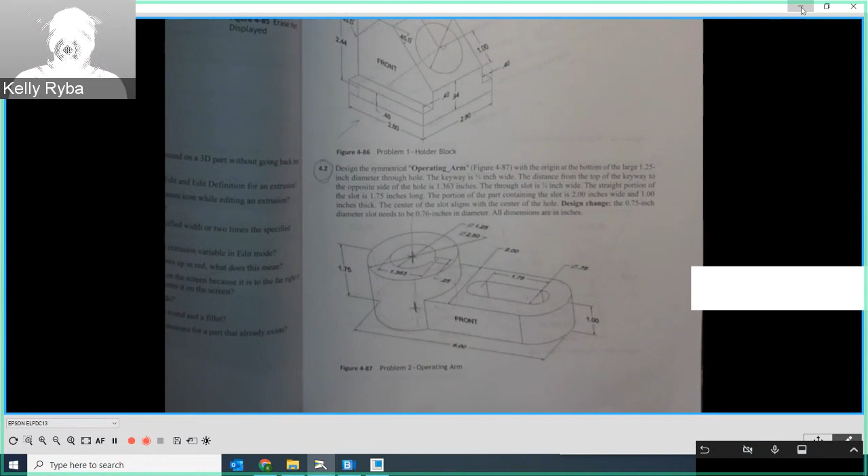So I am going to minimize this, minimize that, and now I have my Creo open to a fresh session. First thing I'm going to do is select my working directory. Always need to do this before we do anything else. So I'm going to click here. I'm on my H drive. You can have your working directory wherever it needs to be. It's going to be Creo 1.

Now what I'm going to do is open up the operating arm that I already created so we can see what our final product is going to be. And here it is. Okay, so we are going to be creating this part right here.

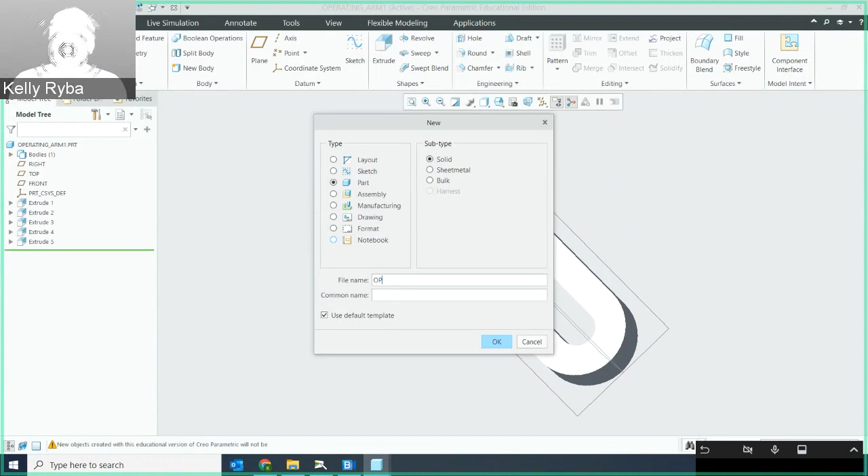So I am going to be starting fresh by saying new part, and it's going to be operating arm. And I'm going to do _3.

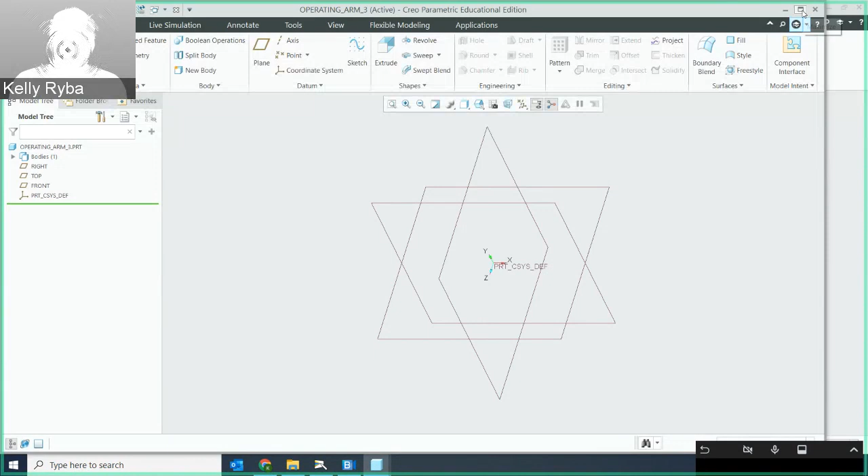Okay, no, I'm going to have to take a drink here and there. I'm getting over a cold and I still have that little lingering cough. As I talk, sometimes I get that little tickle, so I'm going to maybe pause once in a while to help that a little bit.

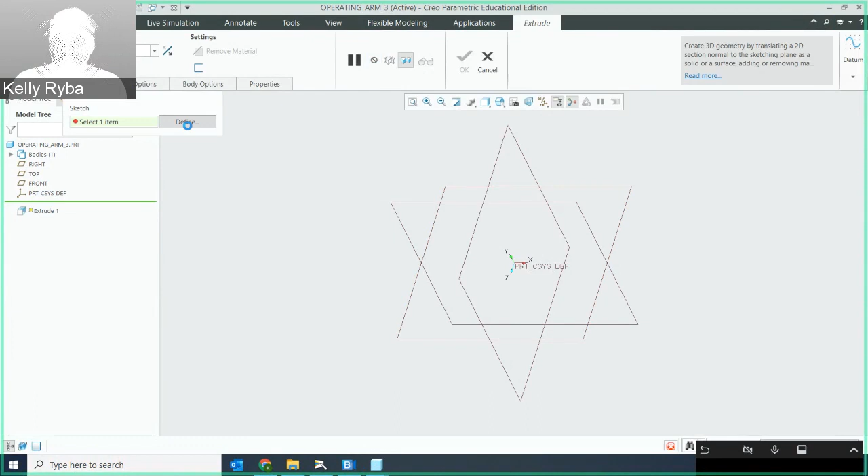Okay, so I'm going to extrude. I'm going to hit extrude, not sketch, because I know that I'm going to be extruding this boss and I need to place it. So I'm going to hit placement, define, and I'm going to be on my top plane. I'm just hovering over to be sure that this is my top plane. I'm going to click there and say I'm going to sketch on that because I have to sketch before I extrude. Then I'm going to click on my sketch view and zoom in.

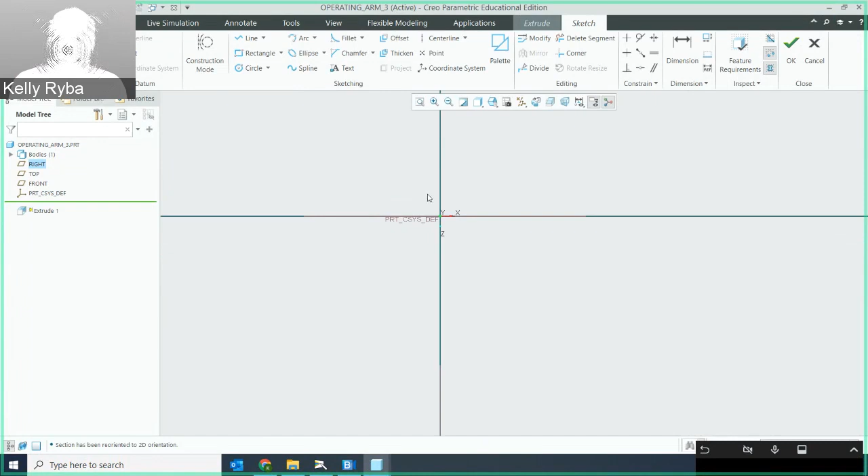And I'm zooming in a bunch of times, otherwise my circle is going to be super small on the screen. So I'm going to click at that center, left click, middle mouse button to end it. 1.59, I'm going to double click. This needs to be 2.5. Okay, perfect. Now that's all that I need to do for this first boss.

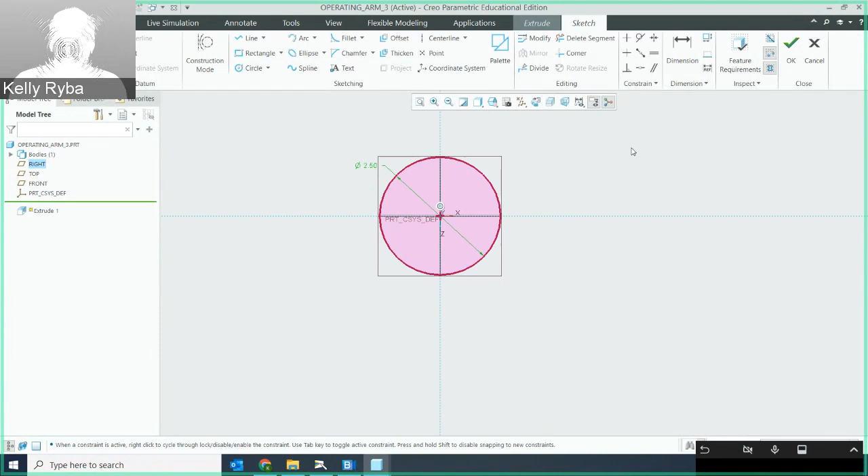So I'm going to click Feature Requirements. That's going to let me know if I'm fully constrained in order to do my extrude. And I am, I've got 2 green check marks. So I'm going to hit Close and OK.

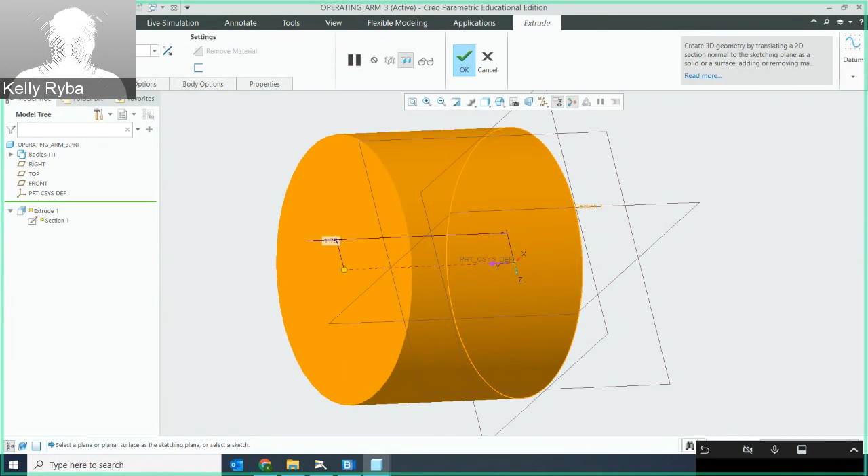And now I'm going to use my roller, my middle mouse button, and just move this around to see what's going on. So my top plane is back here and I'm extruding above, which is the direction I want to go in. So that's good. Now I can change this length of 2.5 inches in one of 2 places. I can do it here by double clicking it, and I can put 1.75 in here, or I can actually do it right up here. Either place, but once it's where I need it to be, it looks good. I'm going to hit OK.

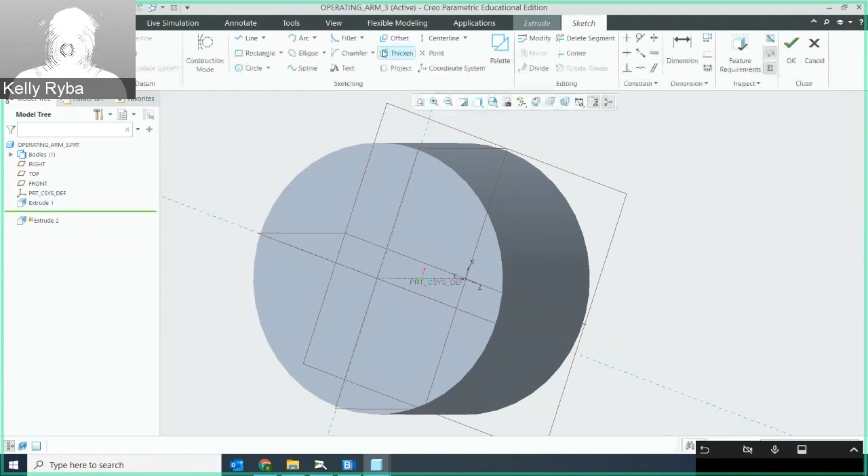Now I'm going to add in my through hole. And my through hole, I'm going to start on this top plane that I just created, or this top surface. So I'm going to click that and say I'm going to extrude off of that surface. I'm going to hit my sketch view so I can see it straight on, and I'm simply going to draw a circle, click, and kind of snap to that center when I get close on that origin. Left mouse button, middle mouse button. And now this is going to be 1.5.

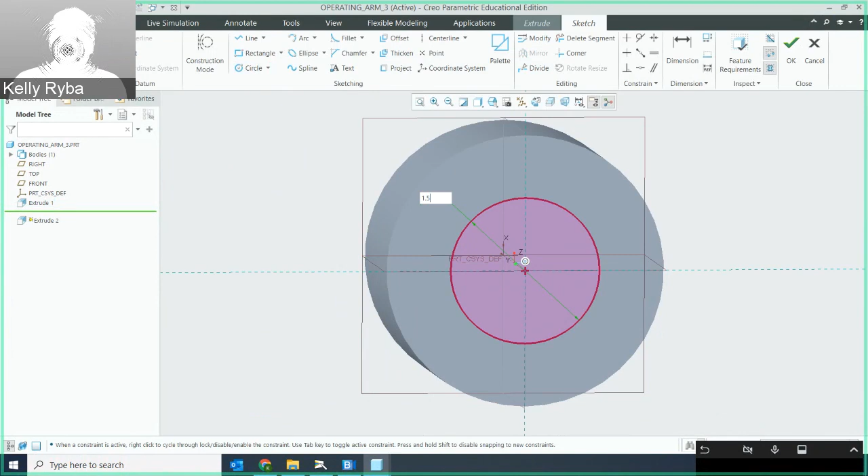Okay, now I'm just going to check. Notice that it's on the surface here, and I'm going to extrude this going all the way through. I'm going to check to make sure I'm ready. Two green check marks, I'm good to go, and I'm going to hit OK.

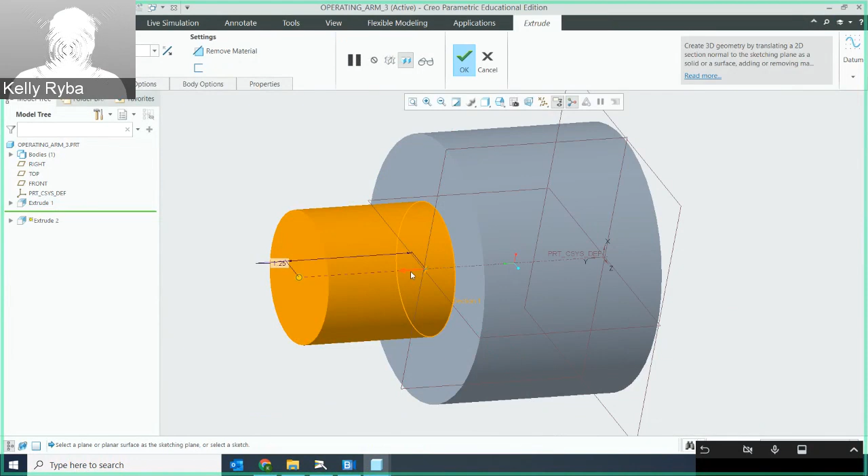Now it's going to start out and it's going to think I want to add another boss going in the opposite direction, but I don't. So you'll notice there's a purple arrow here. If I toggle on that, it's going to say, oh, you probably want to remove material. And I do.

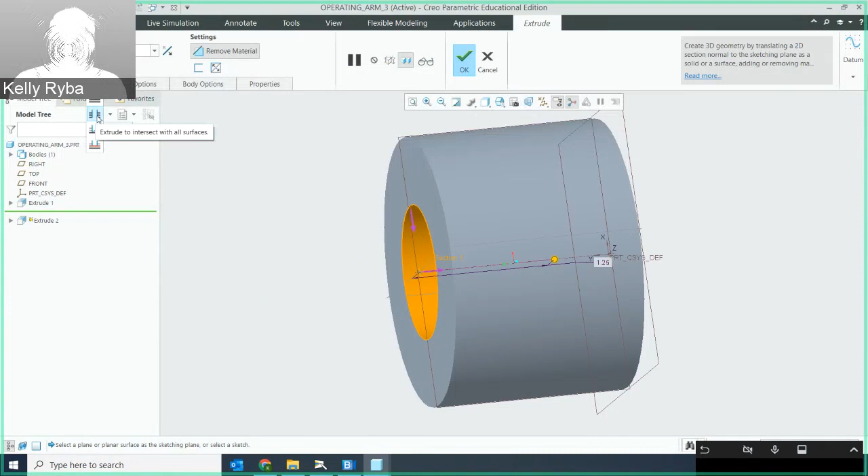But it's removing it to a depth, and instead I want to change this to the fourth one down, which is extrude to intersect with all surfaces. This ensures that this is going to be a through hole no matter what the depth is or the height of that boss if it's ever changed. Now I can hit OK.

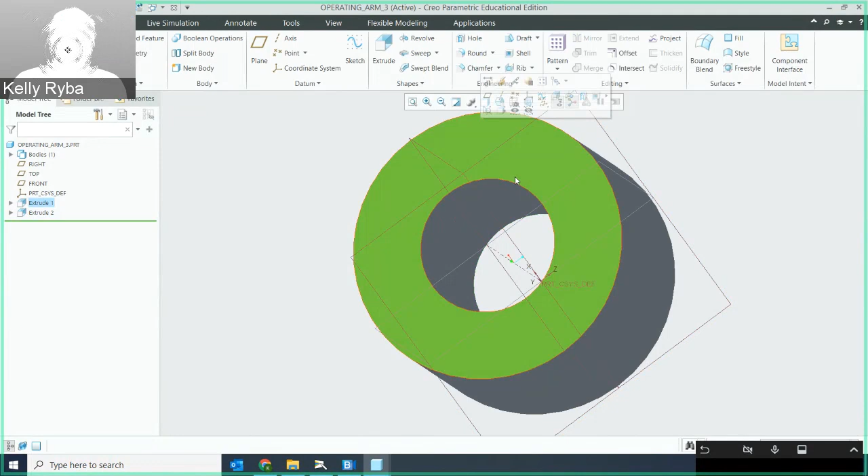Now I'm going to put my key in. So I'm going to select that top surface again, that's green here, and I'm going to extrude my key. So I need to go on my sketch view here so I see it straight on. I'm going to zoom in, and I am going to first project.

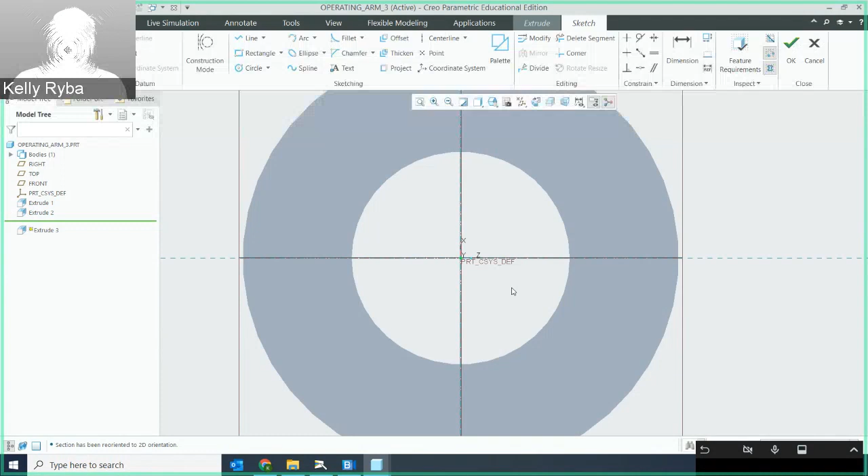What the project allows me to do is use a feature in my sketch that isn't necessarily part of my original sketch. So I'm going to project because I want to use a portion of this circle. I'm going to do both parts of it, the full circle, and I'm going to hit close.

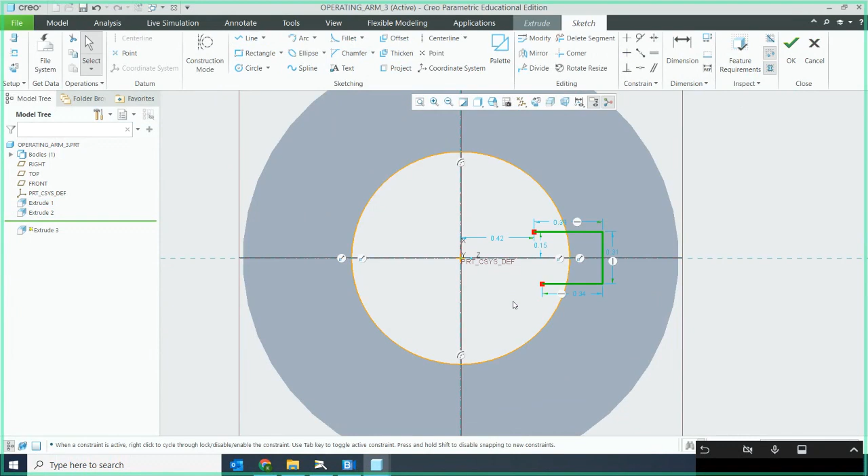Then I'm going to draw my lines, and I'm going to overlap here generously for my keyway. And then I middle mouse buttoned twice. Okay, trying to get out of there.

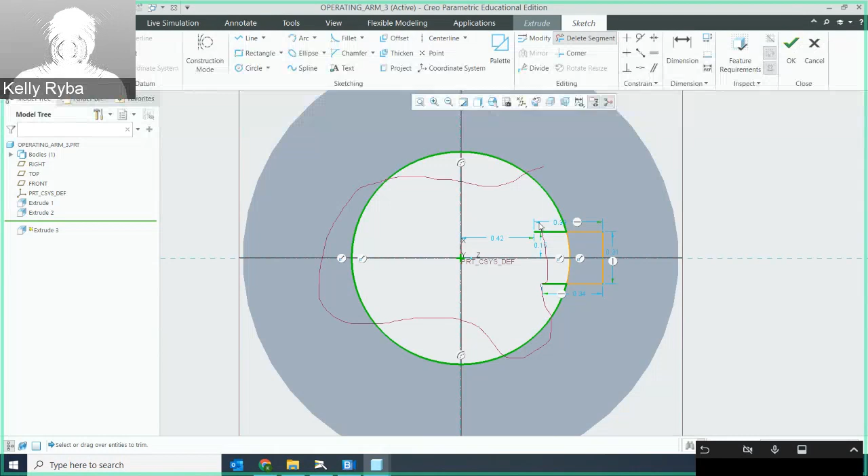Now what I'm going to do is the only part of the circle that I want are these two sections right between. So I am going to delete the segments that I don't want - this segment, this one, and then the two overhangs that I created, so that I'm left with this chunk right here, which is an enclosed section.

Okay, so I need something to be enclosed. I couldn't leave this open here for my keyway, otherwise it wouldn't actually create it - it would give me errors. So I have to have it enclosed, and I need to grab a part of that circle in order to do it. So this is what I want.

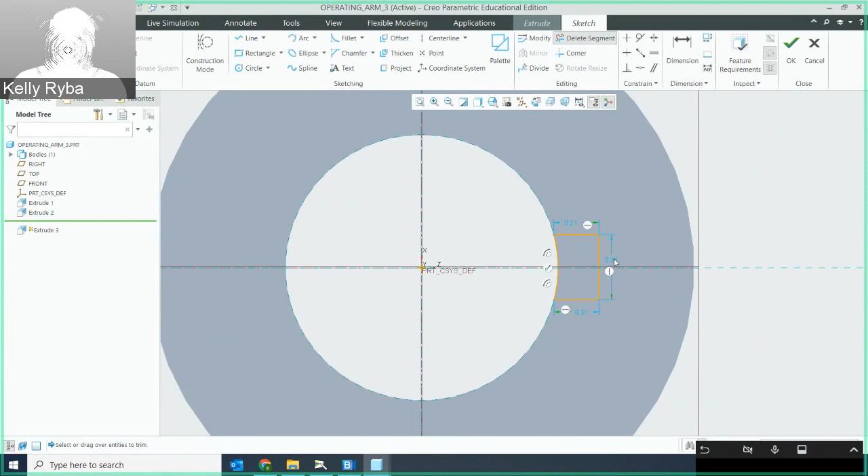So I'm going to double click on the width there of 0.25. I'm going to put this out, and then I'm going to add a dimension for the top to the center, in the middle here, 0.125.

And then I need a dimension from the bottom of my part here. You'll notice there's a little point that's created when I get close there. So I'm going to dimension from that little intersection at the bottom, or on the left side of that circle, to the top of my keyway. Then I'm going to middle mouse button down here, and that dimension is 1.363.

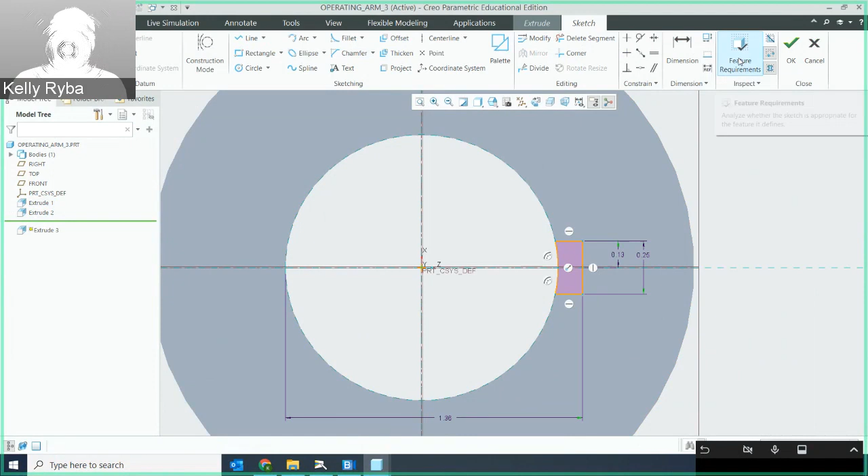There we go. Now I should have everything in place. Feature requirements, I've got two check marks. Again, if you didn't delete all the parts that you're not using, that's usually the reason you're not going to have two green check marks. But I do, so I am okay.

Now, this is also going to assume I'm going to go on the outside, so I'll switch that direction. But I want this to go all the way through and intersect all surfaces. So when I do that, all the way through - if I change that depth from 1.75 to something else, the key and the hole are both going to go through all the time.

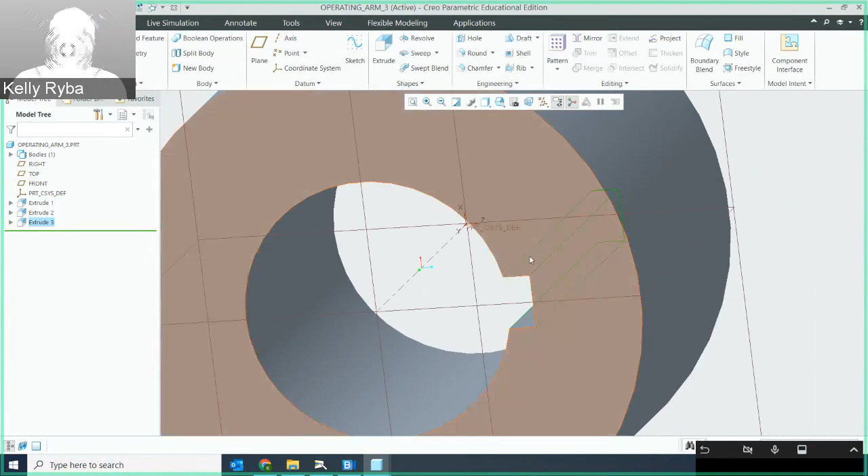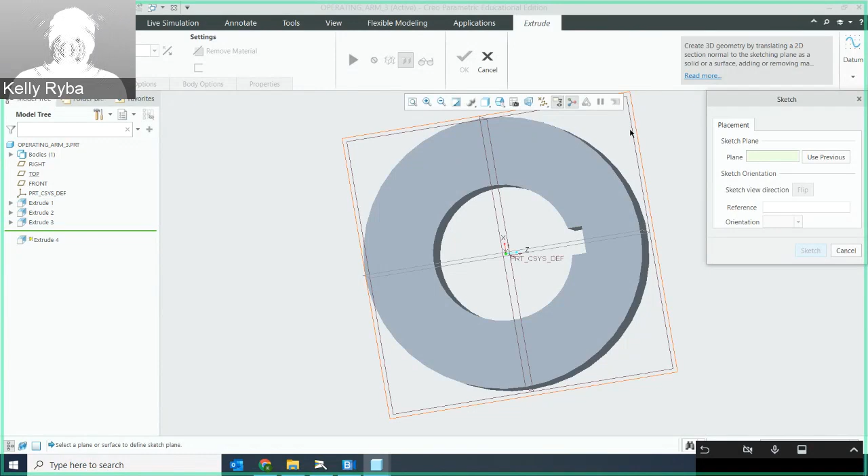Okay, now let's look - I want to now create that extended portion of the arm out to the right. So I am going to extrude, but I'm going to place this - I'm going to go back to my top view. So I need to be on, I believe this is the top plane. Click on that, sketch, and I want to do my sketch view here.

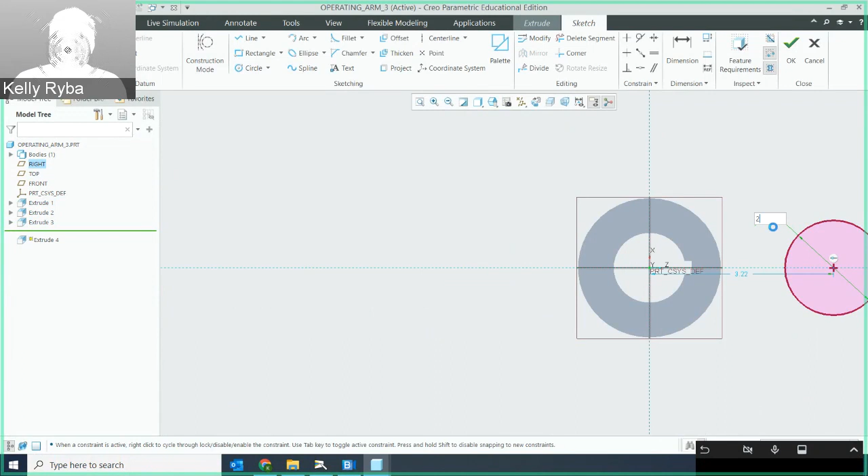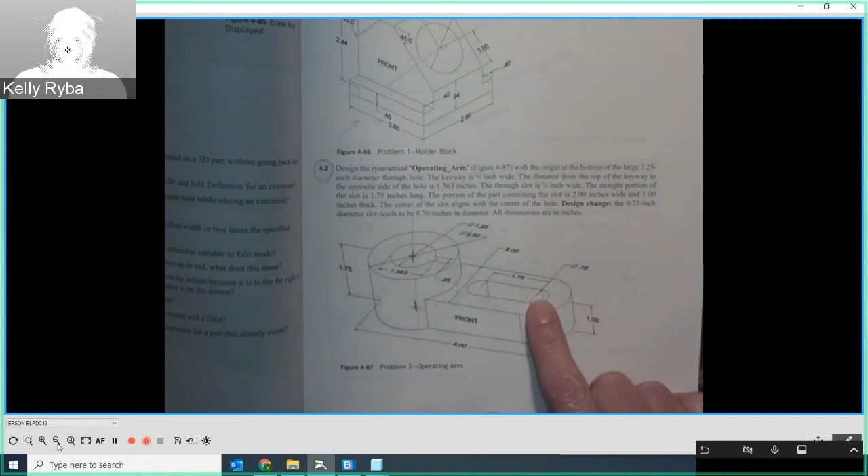I'm just going to zoom out a little bit, and I'm going to draw a circle to the right here, about that size. I don't want it to be equal to the other one - I do want it to be 2 inches. And then I'm going to get everything in place here. There's my 2 inches. Now, my distance between these two, if we look back at our sketch, to the outsides of the radiuses, is 6 inches. So that means from center to center, from here to here, is going to be 6 minus 1, which is 5, and then 5 minus 1 1/4, which is 3.75.

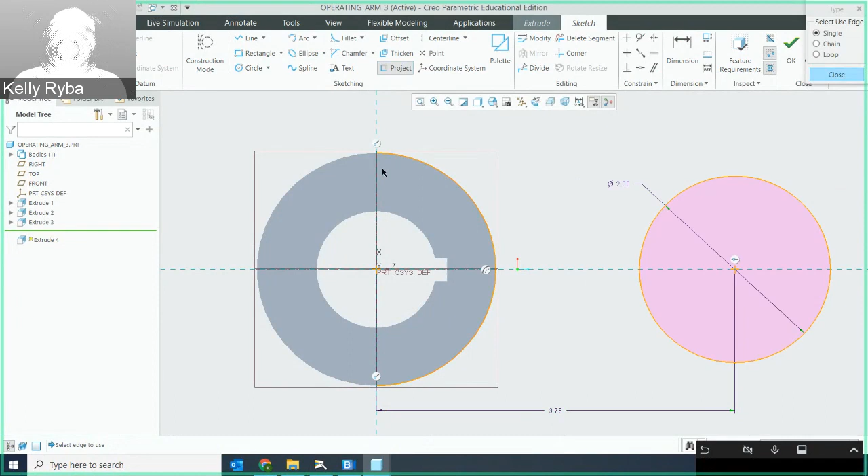So that distance between these is going to be 3.75 inches. Now, I need this arm to be extruded, but I need this portion of that radius. So I'm going to project again this radius for that circle, and close it.

I'm going to draw a line from the top quadrant, horizontal. No, I want it horizontal. What's it doing here? Let me try that again. Line from here, horizontal. There we go. And overlap it generously.

Then I middle mouse button twice. Then I'm going to do another one, get close to that quadrant, draw a horizontal line, overlap, left mouse button, middle mouse button, middle mouse button. Okay.

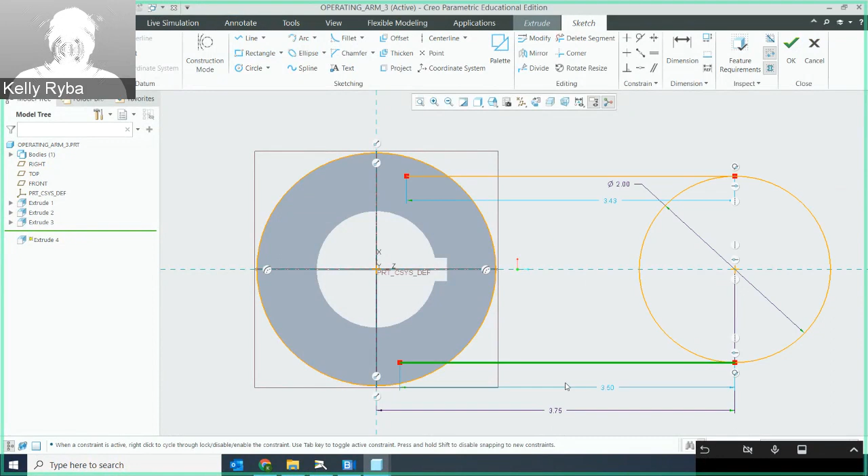Now, what I need to do is delete the segments I do not need. So I'm going to delete a segment here, and here, here, here. What's kind of nice is as you drag here, it's quite efficient.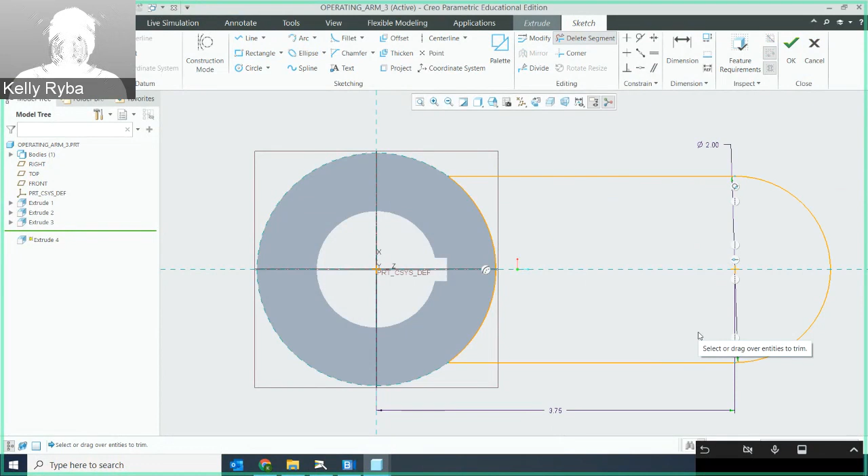All right, so I'm left with this portion of the arc, the line. Oh, this inside I need to get rid of, so I'm still in that command, so I can get rid of these two sections. And now I have kind of that, like, I don't know, I'll call it a peninsula that's left over, okay? Now if I check my feature requirements, I'm ready to go.

Again, if you have any red or yellow there, make sure that you have all of the portions deleted of the projection that you don't need. Okay, now I'm going to hit OK.

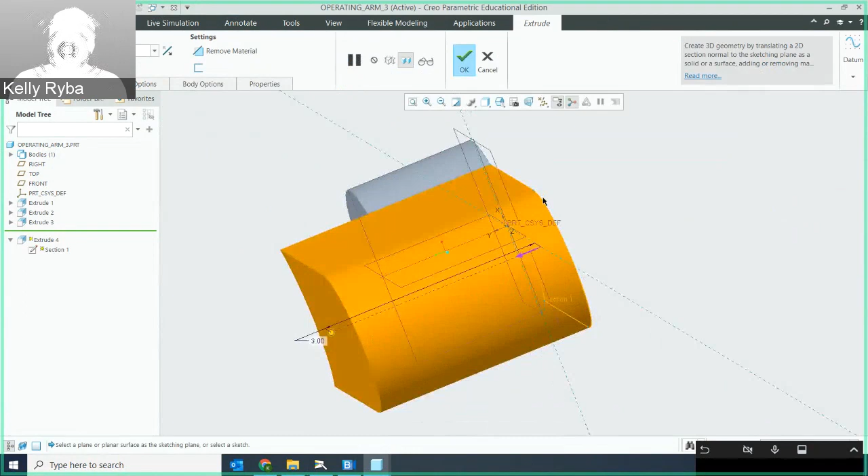And it's going to assume that I want to extrude this 3 inches up, which I don't. I just want to extrude it 1 inch up. And I can hit OK here.

The last part is to put my slot in. So I'm going to use this surface. I'm going to extrude off of that surface, and I'm going to sketch a plane here.

Now, I'm going to draw a circle over at the center of this radius. I am not clicking on this radius yet, or at all, I'm just activating it. It's going to be green. Then I'm going to snap when I get to it, and left click when I get to that center.

Now, if I don't do that, it's going to just kind of randomly go in there. So make sure that you activate that center by just hovering over it before you click it. And now I need this diameter to be 0.75.

Then I'm going to draw another circle along this center line here to the left of it. Just going to click randomly. Now, when I get to the point where these two circles are the same size, you're going to notice an equal sign and the other circle is going to turn green.

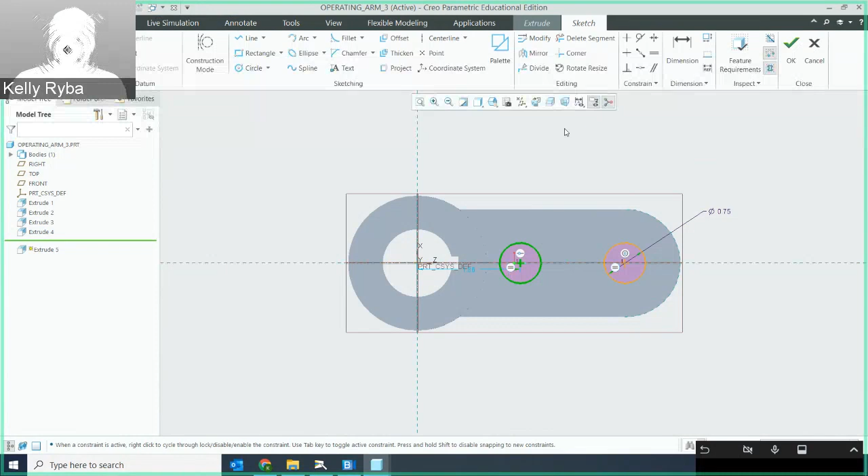I want that because I need these to be equal. I'm going to left click when I get there, and then middle mouse button. Now the last thing I want to do is add a dimension between these two: center line to center line, middle mouse button out here, 1.75.

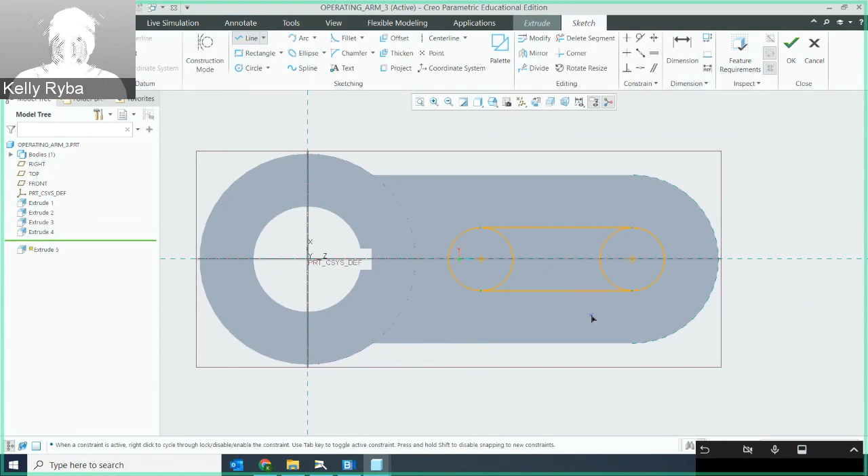Okay, so the positions are good. Now I just need to create the top lines on either one of those quadrants. So line, left mouse button on the quadrant, left mouse button on the quadrant, middle mouse button once and then twice. And then delete the segments that I don't want.

And here. There we go. So now you'll notice I have my sketch on that surface. Feature requirements: I've got 2 green check marks.

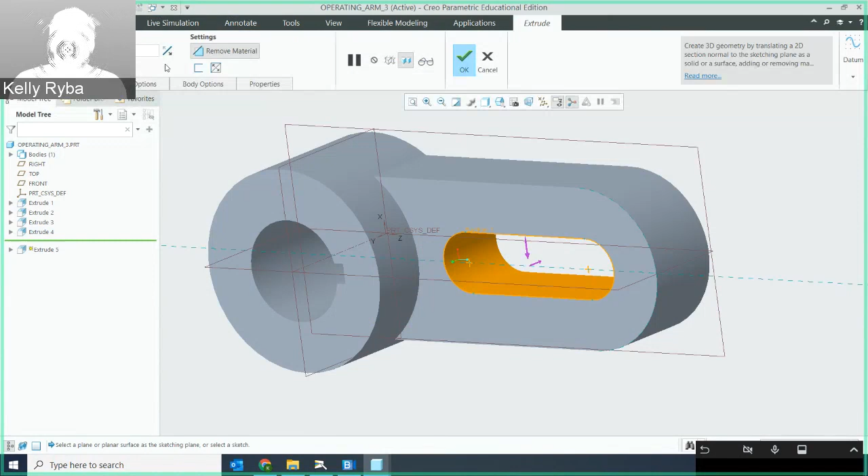I'm good. Okay, and I actually want to change that direction, so I'm going to toggle. But I want this to go through surfaces, not to a depth. I want it to always be through whatever thickness that's going to be. So I'm going to hit OK.

All right, so that is, let me see, let me kind of get this in place here. There we go. I'm going to try to position this so I can really kind of see that things are as they should be. And I think that's pretty good.

Now, to capture this image, I want to make sure that I capture the model on the screen, but then also my model tree. So when I do my Windows Shift S for the snip function, I'm going to go in my upper left-hand corner here, make sure that my model tree is in as well as my model. And then I'm going to release when I get that portion.

Now I have on my clipboard my image so that I can paste it into a document that I then can upload to the Dropbox. Okay, so if you have any additional questions, hopefully this demonstration helped you with the operating arm 4.2.